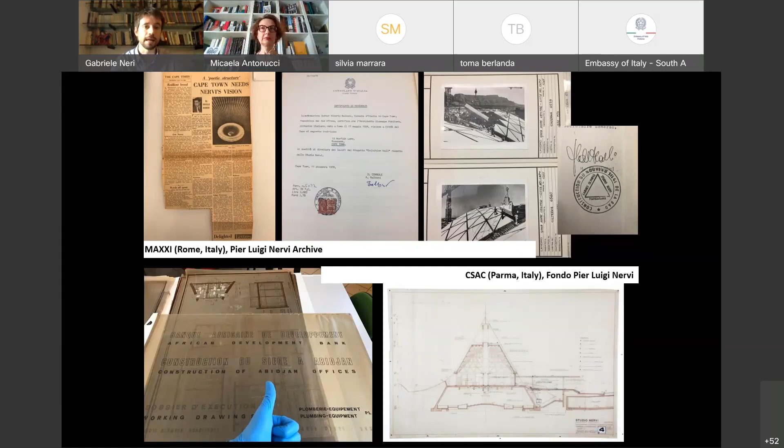So I will briefly present Pier Luigi Nervi, just to let you know who he is and why his work is so interesting. Nervi was one of the protagonists of the 20th century architecture. An extraordinary engineer, theorist, professor, contractor, and entrepreneur. And he reached and experimented with the constructive and expressive possibilities offered in particular by reinforced concrete. And he was admired and celebrated worldwide for his mastery of this material, so Master of Concrete, as the title of the previous slide.

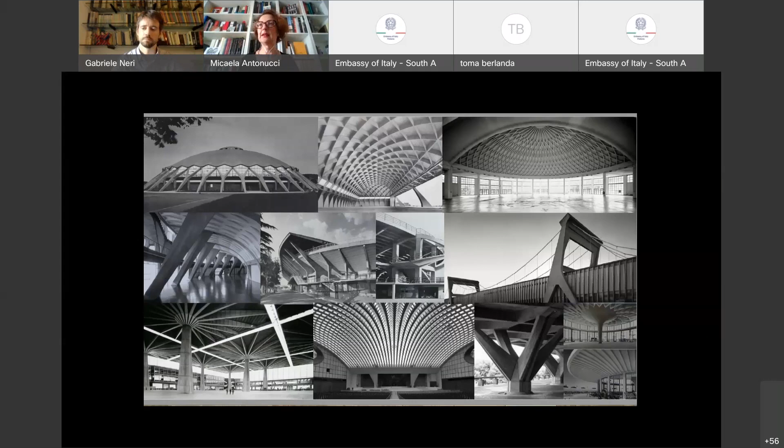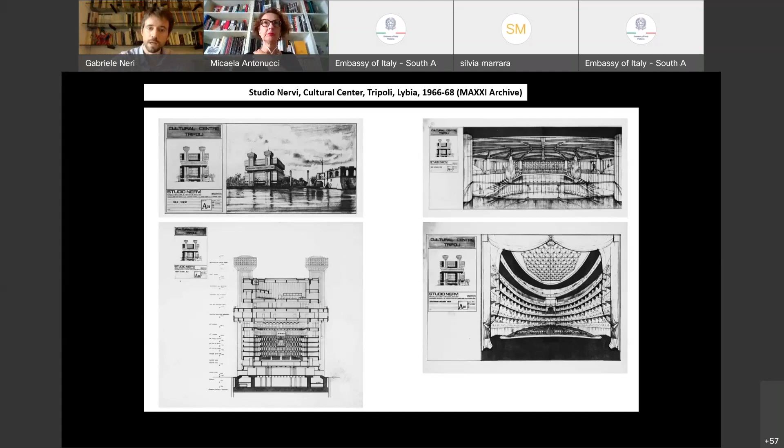In the next slide, you see a very small project, a tiny project, almost entirely self-built. This is the monastery of the Benedictine sisters in Mafinga, a remote location in Tanzania. So quite a strange project, not the kind we are used to looking at when thinking about Pier Luigi Nervi's work. So how did this work come to Studio Nervi?

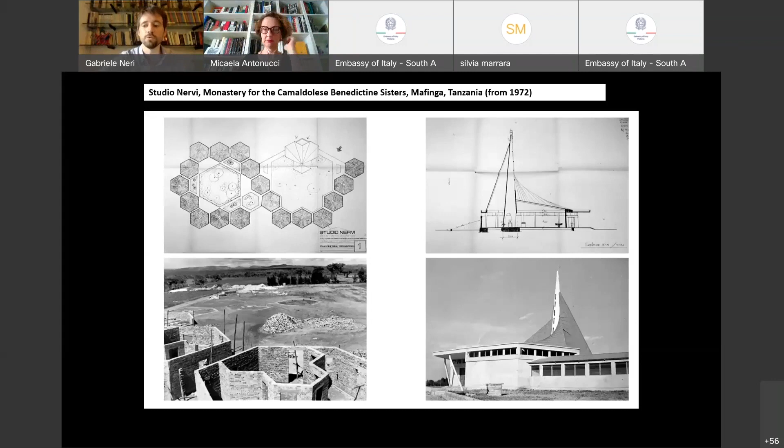Well, it came as a result of the fame of the Nervi Hall in the Vatican City. So the sisters asked Nervi to provide a very small but important project for them in Tanzania. And Nervi donated this project. Then they adapted it to the poor means and technology that they had over there.

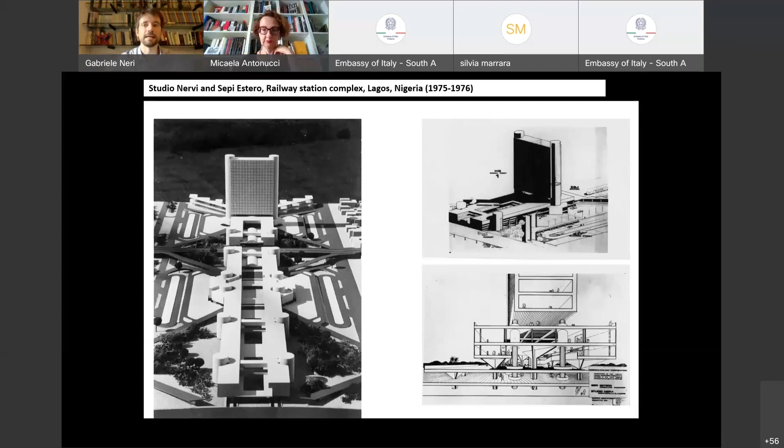Next slide, it's quite the opposite, because this is a mega structure imagined for Lagos in Nigeria for a railway terminal, and it was unbuilt. But here the huge scale of technology tells us of the transformation of African cities after the 1960s.

In the next slide, we start with a specific paragraph about Ivory Coast, because it is quite surprising to note that in terms of total number of commissions and projects, after Italy and the United States, Ivory Coast was the third most prolific country for Studio Nervi. There were about 230 projects in Italy, almost 40 in the United States, and at least 16 projects in this African country, some of which included clusters of several buildings, many of which were built.

This is the first and most important building completed by Studio Nervi in Ivory Coast: the headquarters of the African Development Bank in Abidjan, in the downtown area known as the Plateau. The African Development Bank represented a very important client at that time, given its central role in the economy and politics of the country.

So our first question was, how did Nervi come into contact with this part of Africa? We discovered interesting and somehow hidden plots, mixing the international fame of Nervi as an architect and the political situation of Ivory Coast and also of Togo. In fact, the introduction of Studio Nervi in Ivory Coast happened through an architect, Elpidio Olympio, who is officially recognized as co-designer of this building.

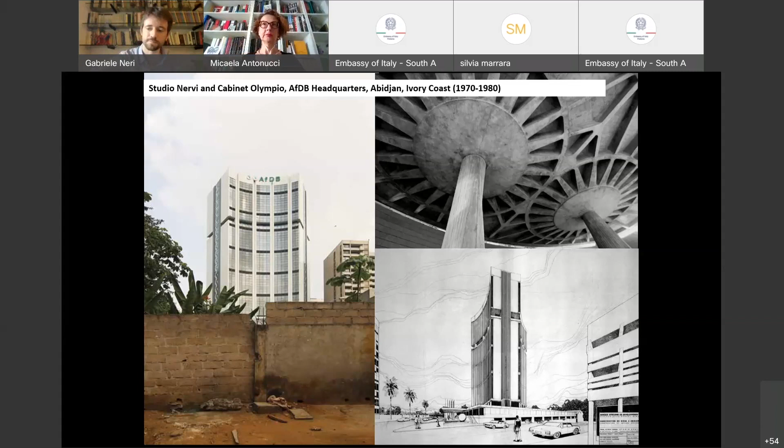So this is another interesting project. We are here in Yamoussoukro, which was the new capital of Ivory Coast, and something similar happens here. Nervi built several buildings in Yamoussoukro, and among them the most important is the private chapel for the president, Houphouët-Boigny. The chapel was formed by joining four sections based on parabolic and hyperbolic geometry, composed of the by-now typical triangular structural mesh used by Nervi over and over again all over the world.

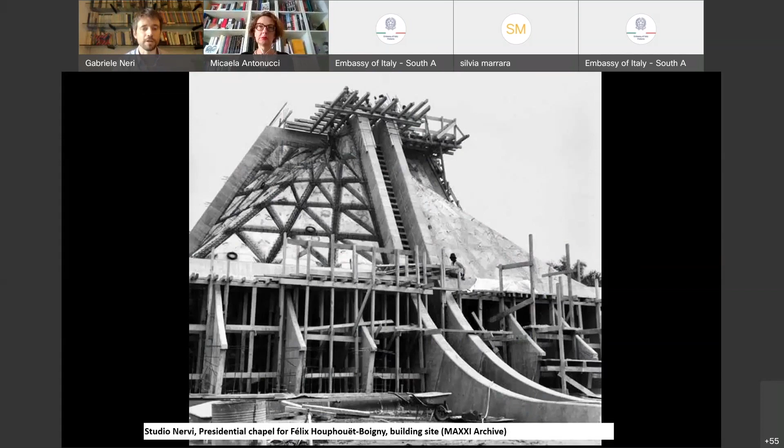This time, again, we could find analogies between, let's say, an Ivorian hut and the shape of this roof. But in this case, as you can see in the next picture quite clearly, this is a picture showing the construction process with this triangular truss of prefab elements.

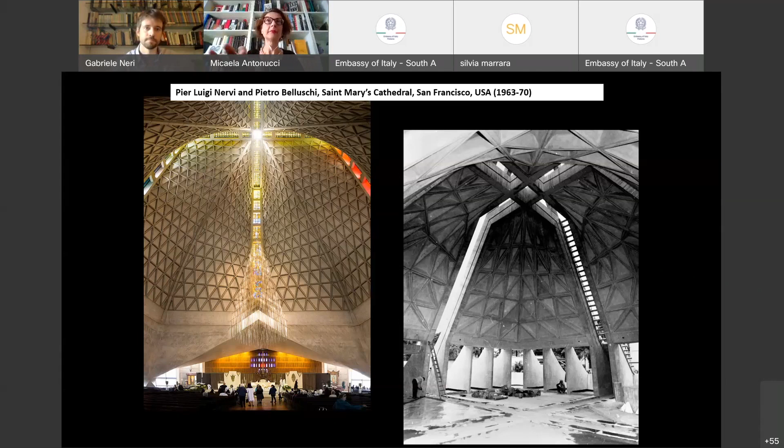Okay, so let's see more closely the works of Nervi in South Africa.

On 4 September 1964, Pier Luigi Nervi was asked to design a large multifunctional complex in the center of Cape Town. This was the first ever African commission for the Italian engineer, who had become a post-war star architect, invited to conduct projects all over the world with his planning studio, where he worked with three of his four sons.

The fourth was a magician, so he didn't want to deal with architecture at all.

The Good Hope Centre was among the last large-scale projects produced by Studio Nervi, and perhaps the last in which Pier Luigi himself took an active part in the design stages before gradually withdrawing from active involvement in his studio, starting in 1971. His name began to circulate in South Africa.

Shortly after Cape Town, came a request from the City Council of Pretoria for a consult on the project of a rugby stadium with a capacity of 100,000 spectators.

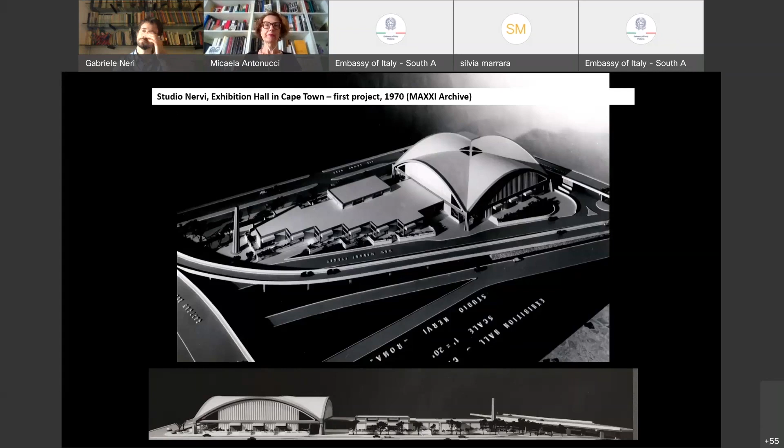Apart from this model of the project, an even larger model was produced, which presented the project within the plans for the new District 6 after the demolition of the old quarter, proposed by the City Council, to which the exhibition hall would be connected by a monumental bridge.

The project, however, experienced another unexpected setback when the South African State Treasury failed to approve the inclusion of this building in the Council Capital Programme for 1971. This blocked the availability of funds and forced the municipality of Cape Town to delay construction.

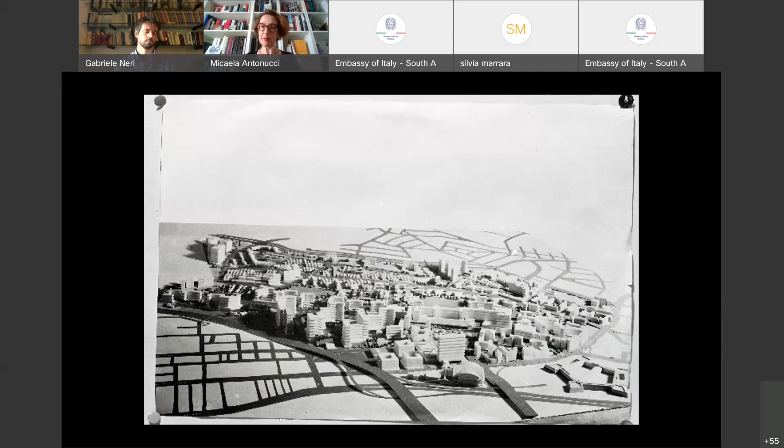Contact with Studio Nervi would only be resumed in November 1972, when funds were finally freed up. A joint venture was thus constituted in 1973 with the Cape Town-based firm Colin & Meiring, both for planning and management of works of the exhibition hall.

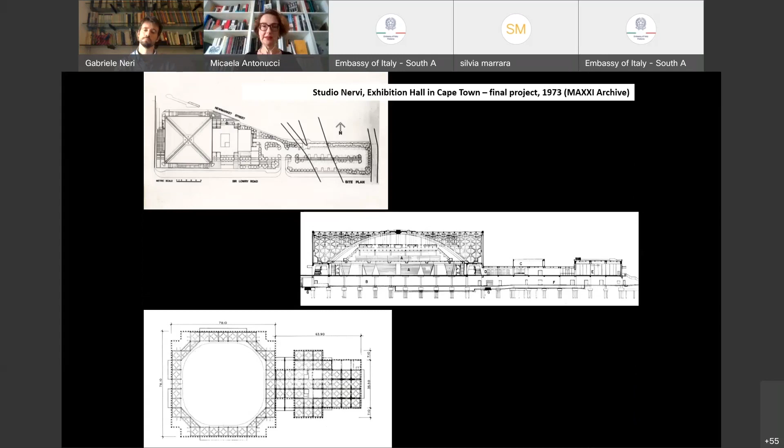This is the final project. To contain cost and reduce spending, a new version with drastic revisions was put forward. One of the main features were the support bases at the corners of the structure, upon which the crossvault would rest. As you can see in this slide, these are massive inclined concrete piers.

With the operational plan in place, a significant snag delayed the start of the construction works. The problem was applying Nervi's construction methods within the context of South African building practices, for which finding an appropriate local contractor was essential.

So only in March 1975 was the contract signed with the Cape Town-based firm Murray & Roberts for the construction of the exhibition hall, in the office of the Mayor of Cape Town, David Bloomberg, in the presence of all the interested parties.

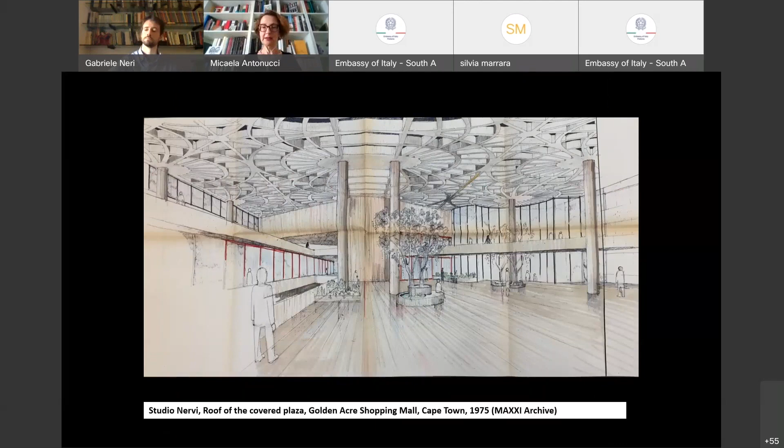At the time, the working relationships with South African partners had extended to other buildings, such as the Golden Acre Shopping Centre that Murray & Roberts was building in Cape Town on behalf of Louis Karol Architects, a local firm, which had asked Studio Nervi to consult on the design of a large roof covering the central space of the mall.

This, as you can see in this slide, is a drawing of the roof project from the MAXXI Archive, which, however, was never constructed.

Work began in April 1975, and several times in the following years, Studio Nervi had to enter into a series of careful negotiations with the local builder, Murray & Roberts, to adapt their construction methods.

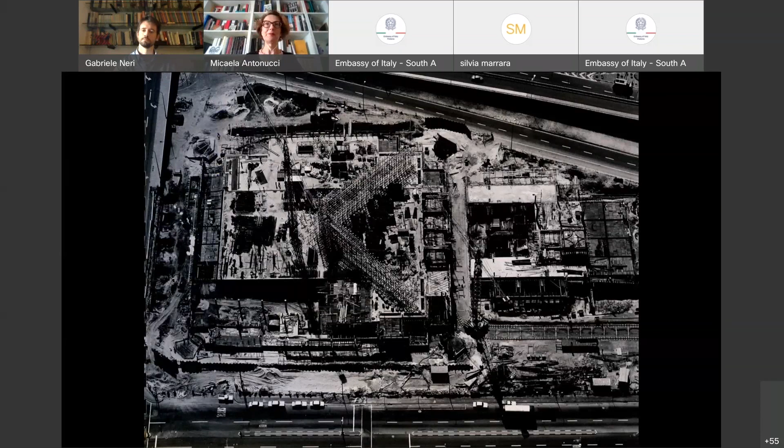The construction of the giant cross-vault was achieved using the so-called structural prefabrication, a system patented by Nervi. The structure, as you can see in this slide, was decomposed into single modular pieces, which would then be hoisted into place and cast together to form a single solid structure.

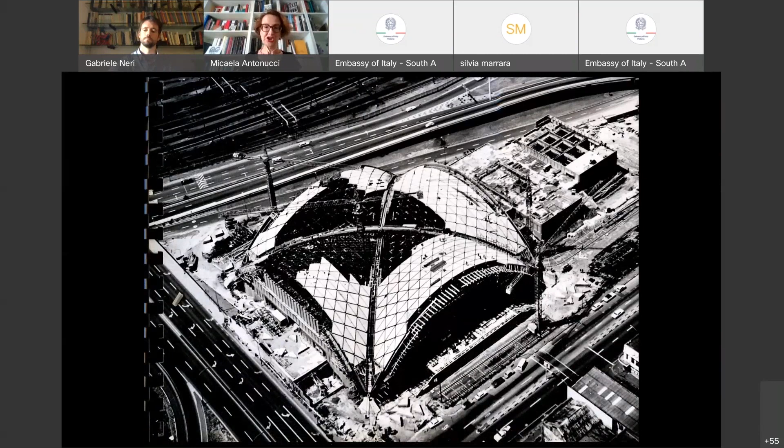In order to raise the arches and sections of the vault using structural prefabrication, the company had to build an imposing and complex scaffolding of steel tubing on adjustable supports. Here we can see it, a sort of steel hill facing the stone mountain.

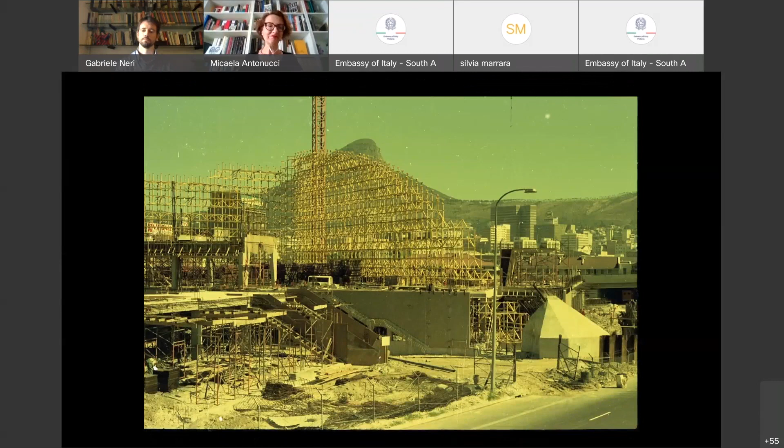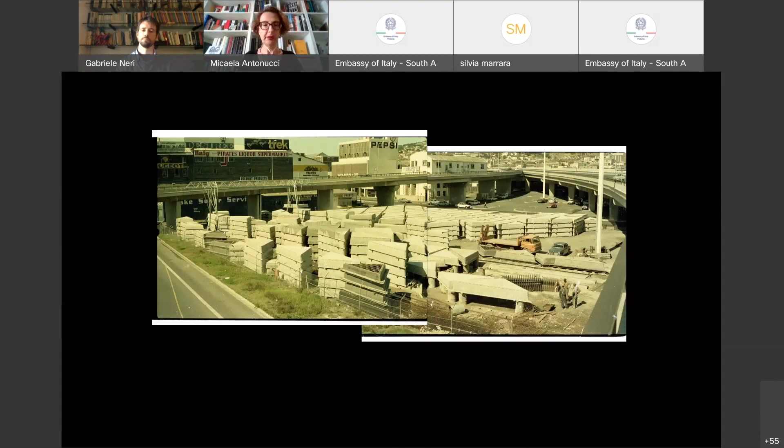These are the prefabricated modules which compose the vault. The site where these coffers forming a vault would be prefabricated had to be moved close to the building site, because transporting them from the Murray & Roberts production site in Philippi would have been too expensive.

Each of the 4 sections of the vault, divided by the 2 diagonal arches, was composed of 223 precast triangular coffers, totaling...

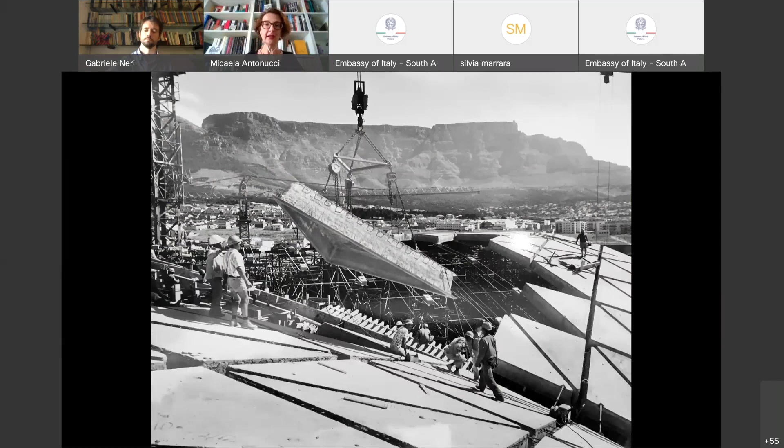892 modules. Internally, the intrados of the vault would exhibit a ribbed surface of regular geometric patterns, formed by leaving in view the joints of the triangular coffers of which it is composed.

This is typical of Nervi's design, which combines geometry and construction, creating what he called the aesthetic expressiveness of the structure, as we can see in most of the famous buildings and monuments built by Nervi.

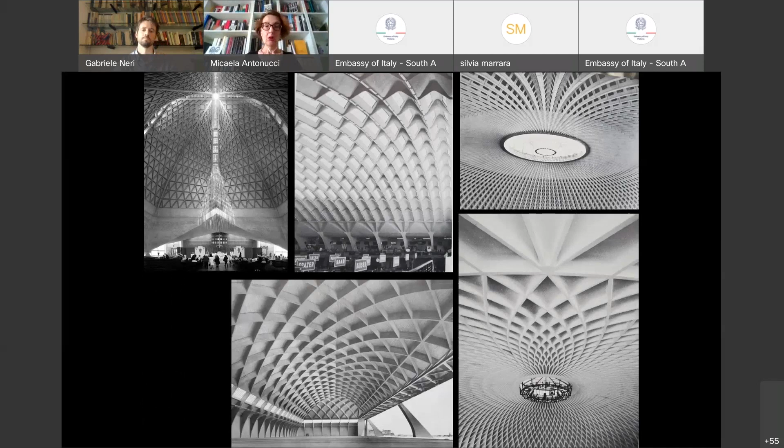While construction proceeded with highs and lows, there were discussions about the naming of the structure, which up to this point had been referred to as Nervi Hall, just like the Papal Audience Hall in the Vatican City.

A flurry of proposals erupted, among them the idea of officially christening the building Nervi Hall. But in the end, the winning proposal of a public contest was settled on.

The building was baptized as the Good Hope Centre. The local press celebrated in enthusiastic terms the world record building that Cape Town could now proudly present to the world.

On 2 September 1977, the official opening of the structure took place with much fanfare. Antonio Nervi gave a short speech and handed a symbolic key to the mayor.

On 3 September, the day after the grand opening, the Weekend Argus, a progressive daily paper, published an article entitled 'Multi-Race Theatre Calls as Good Hope Center Opens,' publicizing the announcement of the Cape Town mayor, John Tyers, that the multifunctional center planned by Studio Nervi would be open to all races, although with some limitations.

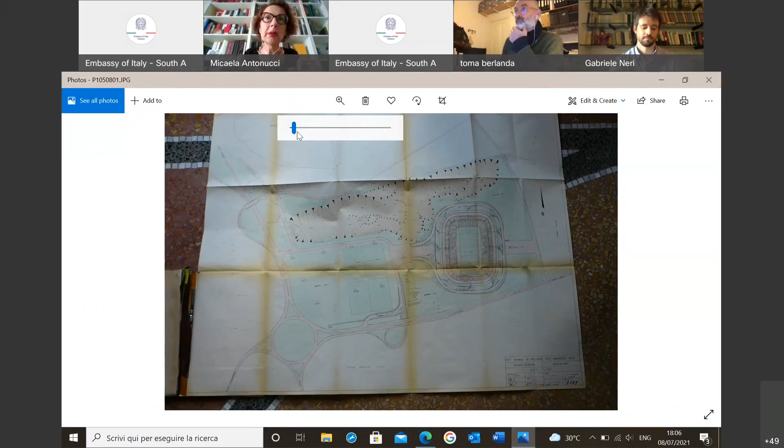There are no further indications on the drawing, so I don't know. Maybe it was never built. But the street, those streets, we can pinpoint those streets, but they have no name. Maybe... oh yeah, maybe they have. George Storrar, I know where that place is. Give me a second, I'm going to map it out. Is there a stadium there?

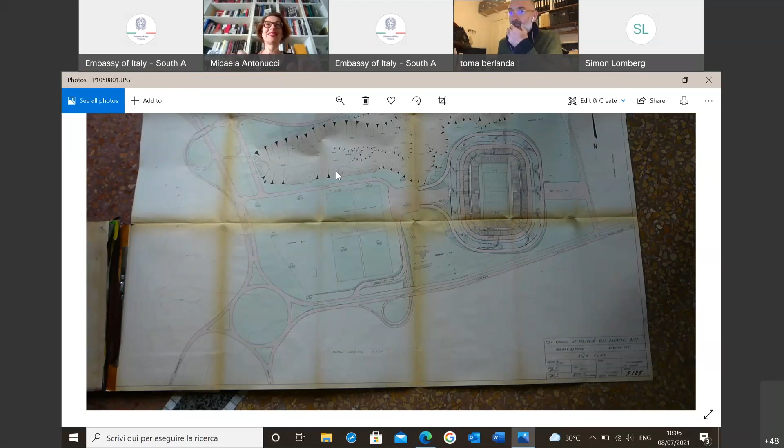Good evening. My wife and I both lived in Pretoria, and we recognize that area. The circle on the bottom left would be the Fountains traffic circle. George Storrar Drive is the main drive at the bottom. There was never any construction, anything remotely like that. The hill, the ridge at the top of the picture would be where the late 1960s University of South Africa main building is. The plain to the left of the proposed stadium was in fact originally the brickworks from which most of Pretoria was built, the Kirkness brickworks. George Storrar Drive is still as is. The rest, where the stadium is meant to be, is now mostly lecture buildings, office buildings of one of the campuses of the University of Pretoria. But to the best of our knowledge, there was never even the start of a stadium built there.

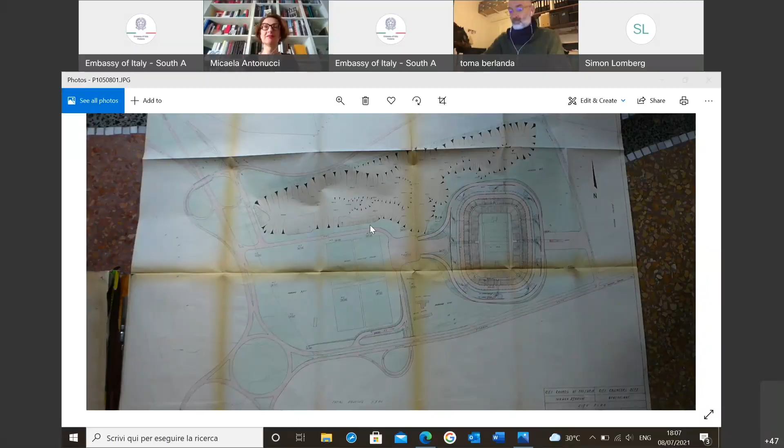I'm going to share my screen. Can you see the map? Yes, there we go. So this one here is George Storrar. Yes, and the stadium would have been here where it says University of Pretoria, which of course is not... where it says UP Groenkloof, yes. There is, it looks like, there is an oblong thing there. Okay, those are just sports fields. So where the sports fields are now used to be the brickworks. And at the top left, you can see the University of South Africa buildings spread out along that ridge. Yes, where the stadium would have been is now just university buildings. Correct, so in this, where this building is, basically the stadium would have been. So I think, as Micaela said, this has never been built, not even begun.

Thank you, we have solved the mystery of the stadium. Thank you so much, it's great information for us. But Nervi was paid as well for his consulting anyway. Thank you, I think that was really exciting unfolding, and that points to the importance of human intelligence besides the archive.

And I wonder if there's any other questions. Thank you, I saw a hand waving on the screen. Maybe, yeah, it's me, Maria Paschini. So I just wanted to ask, so those are the only two designs he did for South Africa, or were there any others? Yeah, only these two.